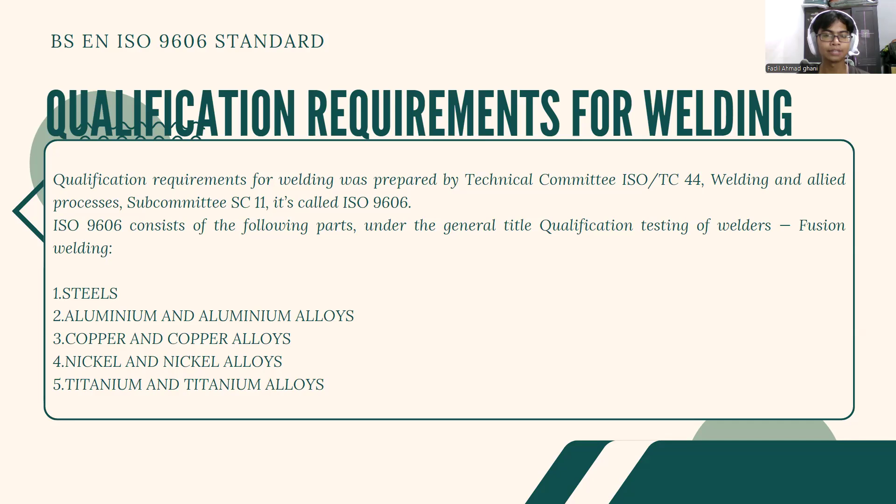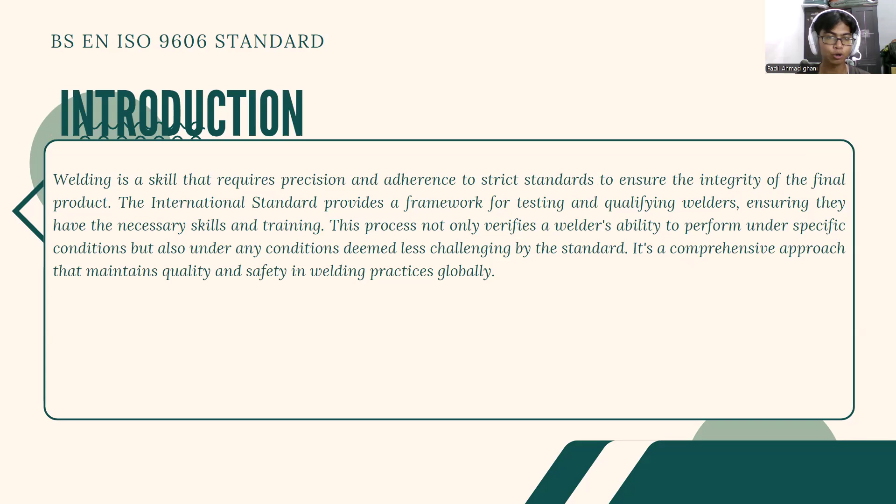Next slide. Introduction. Welding is a skill that requires precision and adherence to strict standards to ensure the integrity of the final product. The international standard provides a framework for testing and qualifying welders, ensuring they have the necessary skills and training. This process not only verifies a welder's ability to perform under specific conditions, but also under any condition deemed less challenging by the standard. It's a comprehensive approach that maintains quality and safety in welding practice globally.

Next, scope. This part of ISO 9606 is qualification testing of welders for fusion welding of steels. The standard outlines a systematic approach to testing, ensuring that welders' qualifications are recognized universally, regardless of product type, location, or examining authority. It emphasizes the welder's skill in manually manipulating the welding equipment to produce a weld that meets quality standards.

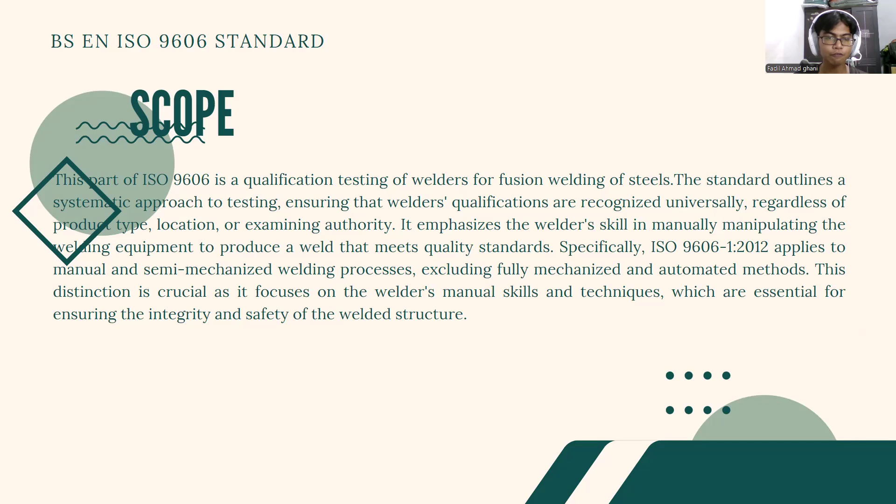Specifically, ISO 9606-1:2012 applies to manual and semi-mechanized welding processes, excluding fully mechanized and automated methods. This distinction is crucial as it focuses on the welder's manual skills and technique, which are essential for ensuring the integrity and safety of the weld structure.

Next, normative references. ISO 857-1, welding and allied process vocabulary, part 1: metal welding process. ISO 3834-2, quality requirements for fusion welding of metallic materials, part 2: comprehensive quality. ISO 3834-3, quality requirements for fusion welding of metallic materials, part 3: standard quality. And ISO 4063, welding and allied process nomenclature of process and reference number, and others.

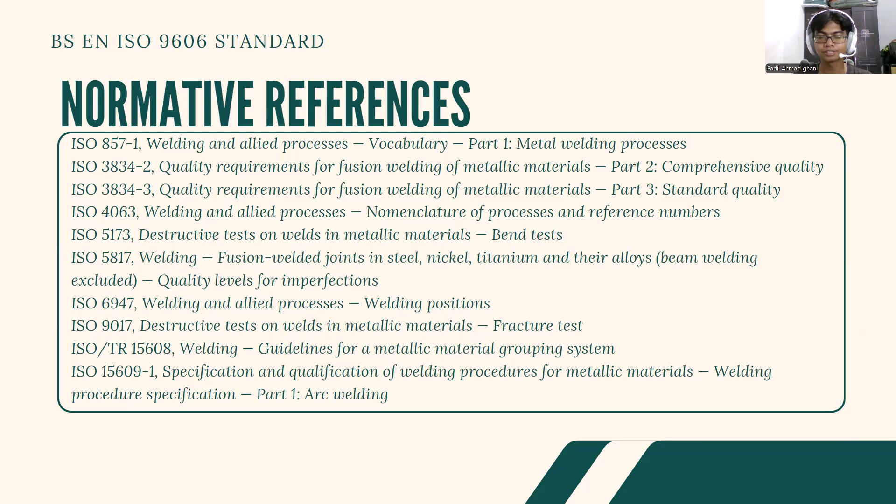I can't tell for complete. You can see in this presentation. Okay, next.

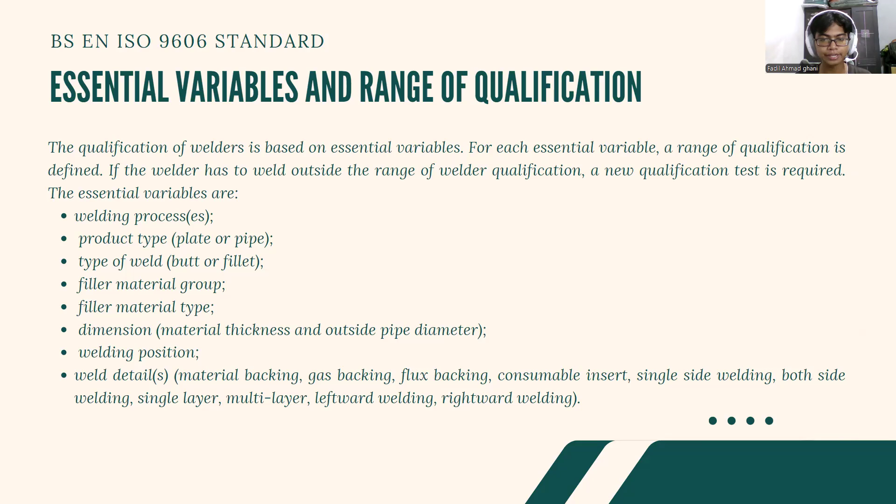The essential variables and range of qualification. I will tell you the qualification of welders based on essential variables. For each essential variable, a range of qualification is defined. If the welder has to weld outside the range of welder's qualification, a new qualification test is required. The essential variables are welding process, product type, type of weld, filler material group, filler material type, dimension, welding position, weld detail like material backing, gas backing, flux backing, consumable insert, single side welding, both side welding, single layer, multi-layer, leftward welding, rightward welding.

Next. Reference qualification: each qualification test needs a new welding qualification, but exceptions are as follows. A change from solid wire electrode 135 to metal cored electrode 138, or vice versa, does not require requalification. A change from solid wire electrode 121 to a tubular cored electrode 125, or vice versa, does not require requalification.

Welding with 141, 143, or 145 qualifies for 141, 142, 143, and 145, but 142 only qualifies for 142. Qualifying the welder for a dip short circuit transfer mode shall qualify him for other transfer modes, but not vice versa.

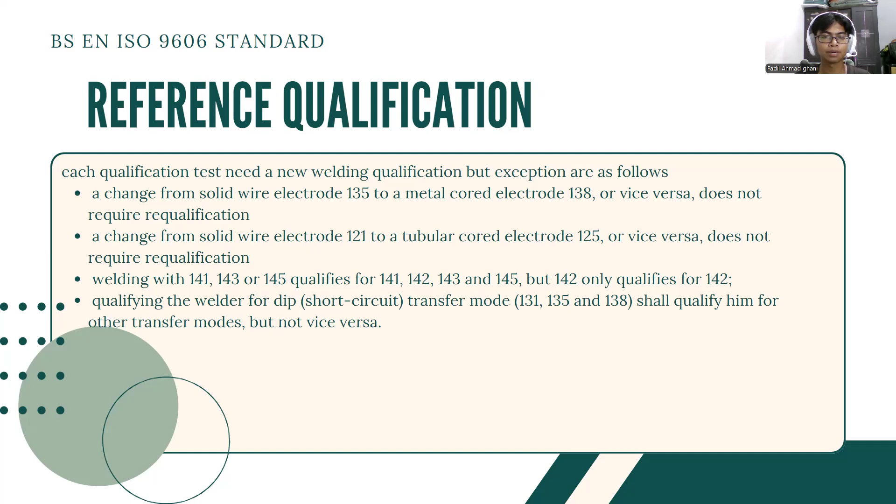Next, examination and testing. The welding of the test piece must be witnessed by the inspector or the examining body. Testing must be verified by an inspector or an examining body. The test piece must be marked with the identification of the examiner and welder. In addition, the welding position for all test pieces must be marked on the test piece.

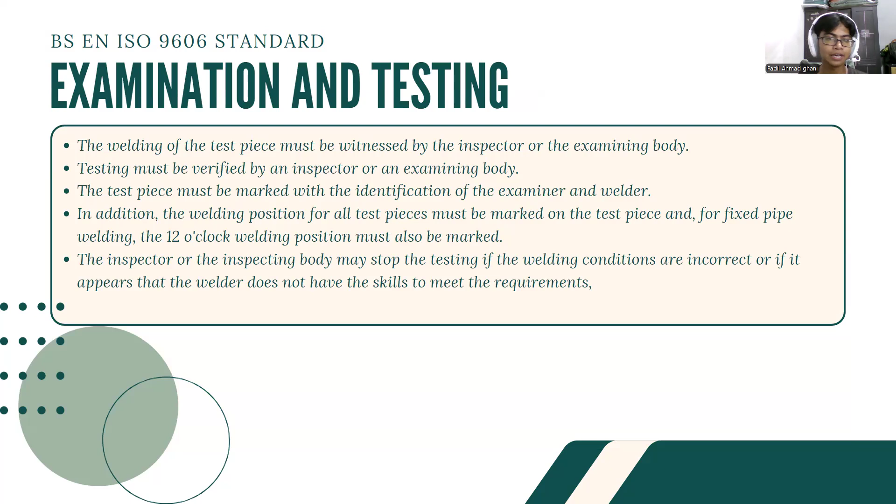And for fixed pipe welding, the 12 o'clock welding position must also be marked. The inspector or the inspecting body may stop the testing if the welding conditions are incorrect or if it appears that the welder does not have the skill to meet the requirement.

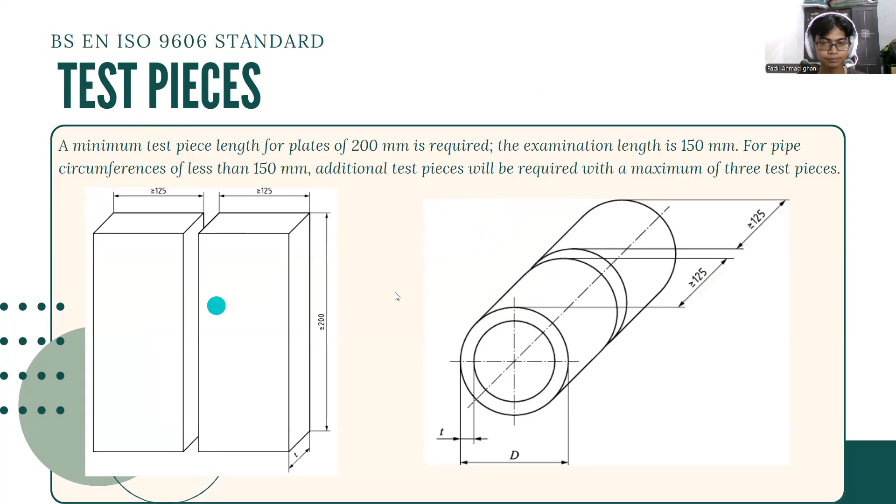Dimension in millimeters, the welder qualification test must follow the WPS in accordance with ISO 15609-1 or ISO 15609-2. The thickness of the fillet weld test piece should be specified in the WPS used for testing.

The following welding conditions will apply. First, the test section must have at least one stop and restart in the root run and in the capping run. The welder should be allowed to eliminate minor imperfections by grinding. Any post-weld heat treatment required in the WPS may be eliminated at the discretion of the manufacturer.

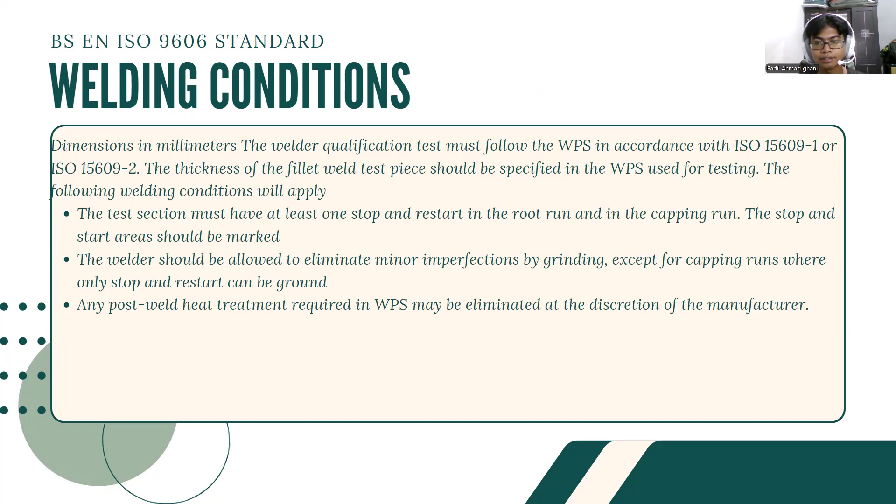Okay, you can see the table. There is the test method for butt weld in plate or pipe, fillet weld, and branch joint, like this. As we can see in the presentation, the test methods are visual testing, radiographic testing, bend testing, and fracture test. For butt weld, all are mandatory, but for fillet and branch joint, only visual testing and fracture test are mandatory.

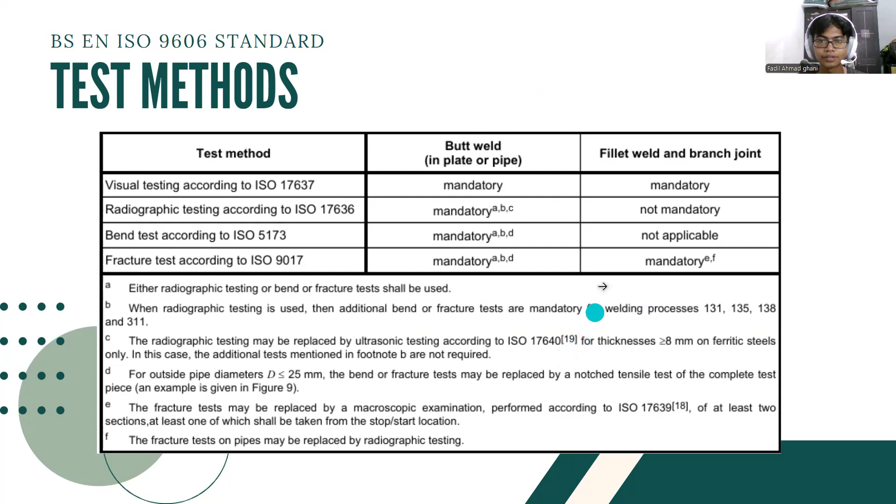Next slide is test piece and test specimen. In plate and pipe, when radiographic testing is used, the examination length of the weld in the test piece shall be radiographed. When fracture testing is used, the test specimen may be longitudinally notched in the center of the weld of the side in tension in order to achieve fracture in the weld.

All notch preparations according to ISO 9017 are permitted. All test specimens shall be tested in such a manner that fracture is reached, and the specimen is examined after fracture. For butt weld in plate, the test piece examination length shall be cut into 4 test specimens of equal width in accordance with the dimension. For butt weld in pipe, the piece examination length shall be cut into 4 test specimens of equal width in accordance with the dimension given.

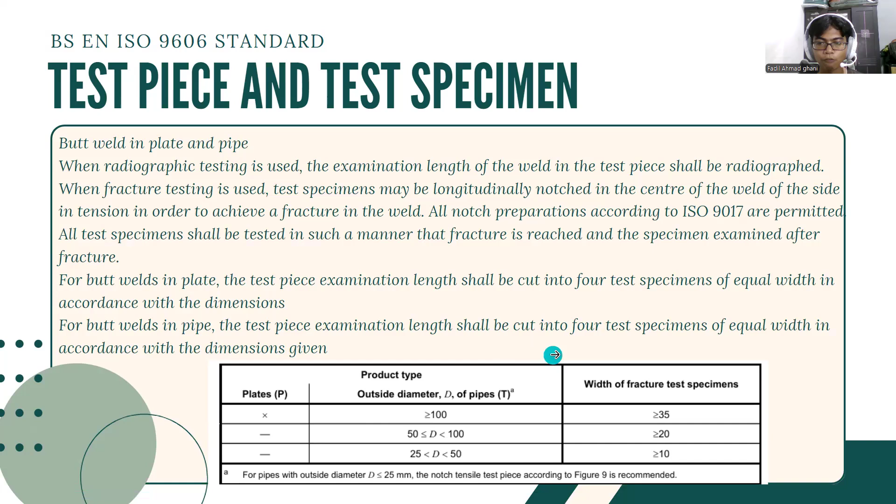This includes plate, product type, outside diameter, width of fracture test specimen. Next, bend testing only.

In accordance with ISO 5173, for thickness t < 12 millimeter, a minimum of 2 root and 2 face bend test specimens shall be used, and the complete examination length shall be tested. For thickness t ≥ 12 millimeter, four side bend test specimens shall be used, approximately equally spaced along the examination length. For pipe butt welds, the 4 specimens shall be equally spaced in accordance with the requirements.

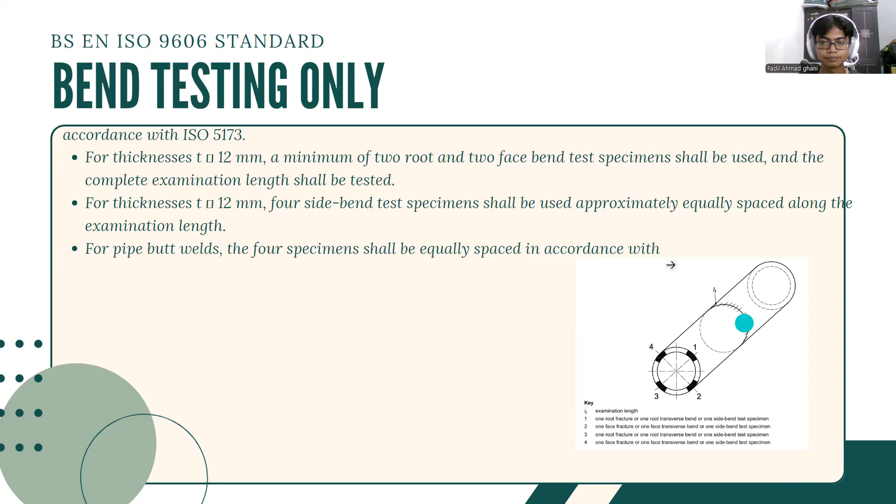Additional bend or fracture tests. When additional bend or fracture tests are required, see the table. In all cases, at least one specimen shall be taken from a stop or start location. For this purpose, it is possible that a side bend specimen can be substituted by a root bend specimen.

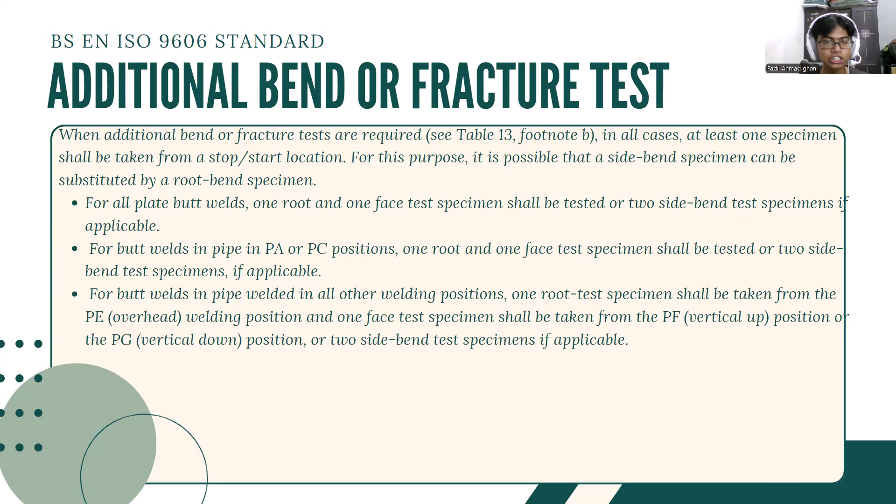For all plate butt welds, one root and one face test specimen shall be tested, or two side bend test specimens if applicable. For butt weld in pipe in PA or PC position, one root and one face test specimen shall be tested, or two side bend test specimens if applicable. For butt weld in pipe in all other welding positions, one root test specimen shall be taken from the PE or overhead welding position, and one face test specimen shall be taken from the PF or vertical up position, or the PG vertical down position, or two side bend test specimens if applicable.

Next, acceptance requirement for test piece. The test piece shall be evaluated according to the acceptance requirements specified for the relevant types of imperfection prior to any testing. The following shall be checked.

First, all slag and spatter are removed. Second, no grinding on the root and face side of the weld. Third, stop and restart in the root run and in the capping run are identified. And last, the profile and dimension.

The acceptance requirement for imperfection found by test methods performed according to this part of ISO 9606. There are some exceptions. A welder can qualify in the event of a defect. This is in accordance with ISO 5817. So it is categorized as a quality grade B.

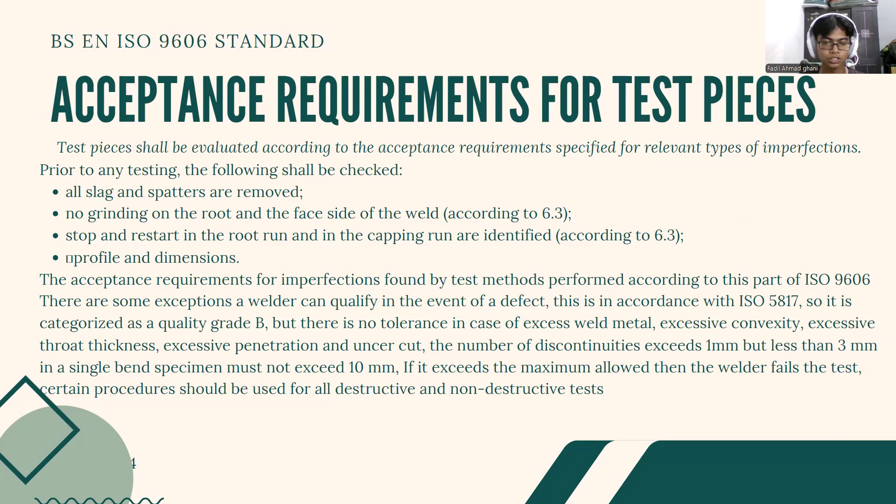Period of validity. The welder's qualification begins from the date of welding of the test piece, provided that the required testing has been carried out and the test results obtained were accepted. The certificate needs to be confirmed every 6 months, otherwise the certificate becomes invalid.

Revalidation of welder qualification. The skill of the welder shall be periodically verified by one of the following methods. First, the welder shall be retested every 3 years. Second, every 2 years, two welds made during the last 6 months of the validity period shall be tested by radiographic or ultrasonic testing or destructive testing, and shall be recorded.

A welder qualification for any certificate shall be valid as long as it is confirmed, provided all the following conditions are fulfilled. First, the welder is working for the same manufacturer for whom he or she qualified and who is responsible for the manufacture of the product.

Second, the manufacturer's quality program has been verified in accordance with ISO 3834-2 or ISO 3834-3.

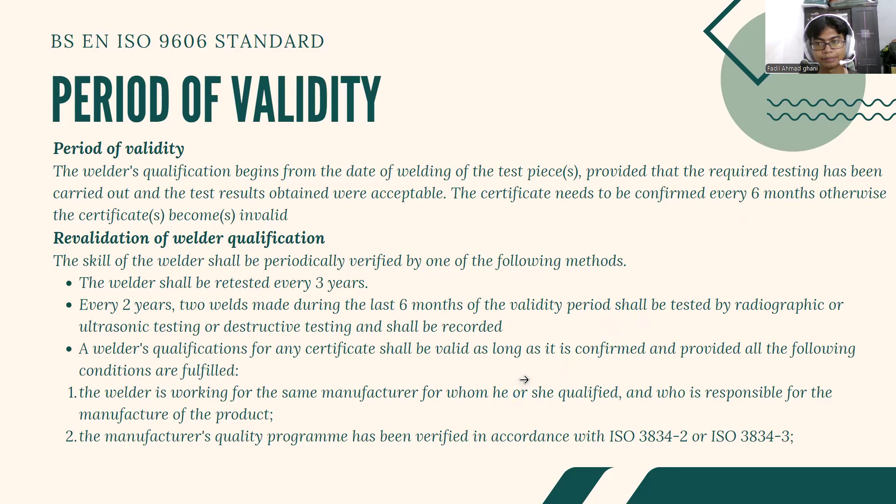Welder qualification test certificate. A welder who has passed the verification must be noted on the certificate. If the test piece fails the test, then no certificate is issued. The following essential variables shall be recorded on the certificate: first, type of current and polarity.

Second, parent material group. Third, shielding gas. In general, a separate welder qualification test certificate must be issued, but all important variables must be noted on the joint certificate. But there are several things that are excluded, namely: first, type of weld, welding position, and thickness deposited.